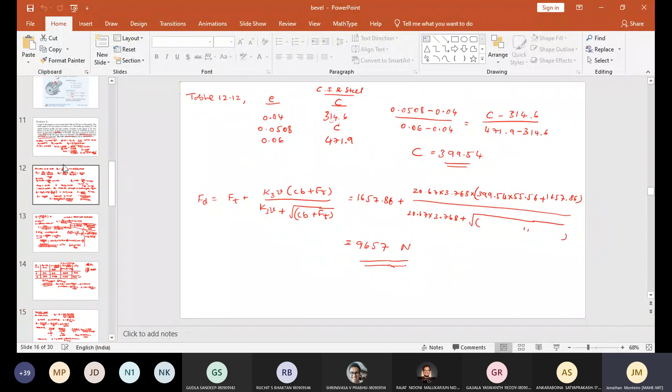Yeah, so we were continuing this problem from the previous class. Let me just recap what we did so that you will be getting a confidence. So here we had a pair of bevel gears. The shaft angle was 60 and speed reduction is 3:1. And in this particular problem, the number of teeth on the pinion was given, but we did not have what is the size of the gear.

And using the conditions that were given, especially the shaft angle, which is of a greater prominence, we came to a formula for delta 1 and delta 2: with the given speed ratio, what will be the individual angles of the bevel gear, that is delta 1 and delta 2, which are the pitch angles we calculated. You might get decimals, no problem, but that is what we calculated from the formula. So the shaft angle decides the pitch cone angle that the bevel gear has.

Then you found out what is the weaker member. You understood that it was the gear that is the weaker member. Then we continued with all the necessary adjustments, or the proportion that was needed for the cone distance as well as the face width of the gear tooth itself, and some changes with respect to FT, that is, we wrote FT in terms of module because module is still unknown, and unless module is known you cannot even find the diameter. So with these things in mind, we retained the equation in terms of module.

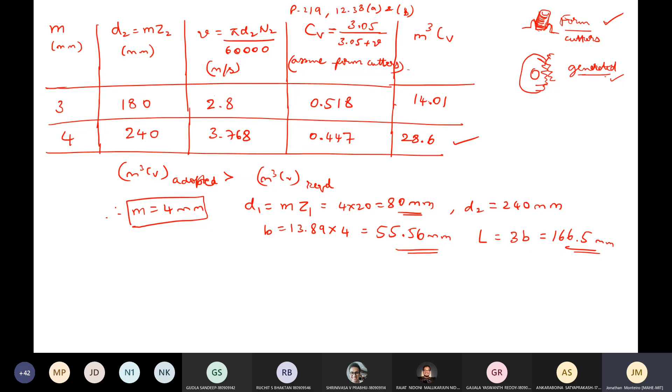Now, coming to dynamic load, we already calculated this, referring to all the 3 tables, 12.12, 12.13, 12.14, the same way. And we calculated the dynamic load FD, which came out to be 9657. I think we stopped here, so we'll continue from here.

What is the wear load? The wear load here, Fw, is D1 b Q Ke by cos delta 1. Again, it depends on D1 and delta 1; it is the pinion which decides the wear. Because cos delta 1 is there, it is a slightly changed equation. On page number 219, the equation number is 12.41.

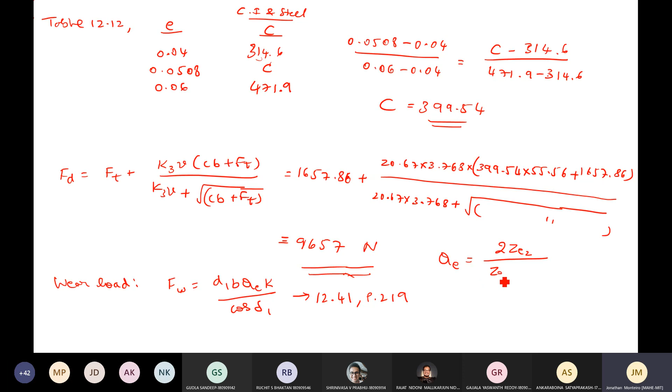And Q depends on Ze2 and Ze1. Q is the ratio factor, 2 Ze2 by Ze2 plus Ze1. We have already calculated Ze1 and Ze2; you can go back to the previous slide and refer there. Ze1 was 20.6 and Ze2 was 86.53. We calculated these in the process of finding the weaker member among the pinion and the gear, so we'll use the same properties here.

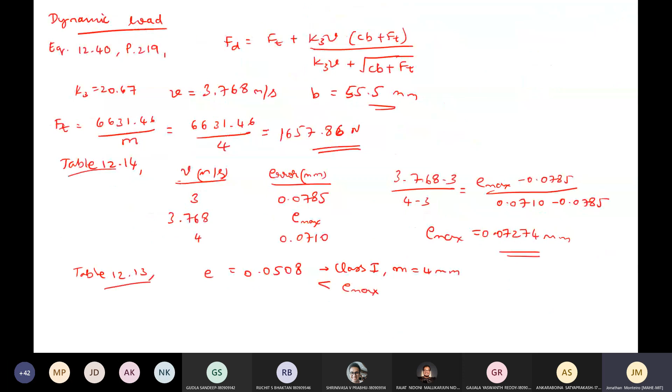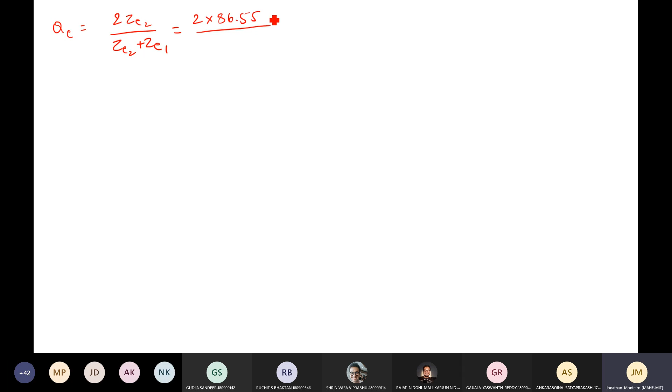Let us find out that QE is equal to 2ZE2 by ZE2 plus ZE1, which must be equal to 2 into 86.55 by 86.55 plus 20.60. So you should get around 1.615. So this will be the ratio, simple ratio to calculate.

Okay. Now since BHN1 and BHN2 are given in the problem itself, BHN1 is 200 and BHN2 is 180. Then you can find out with the 200 and 180 combination what will be the K value. So let us find out whether it is available in the table. If it is available in the table, we will use it directly, otherwise use the formula.

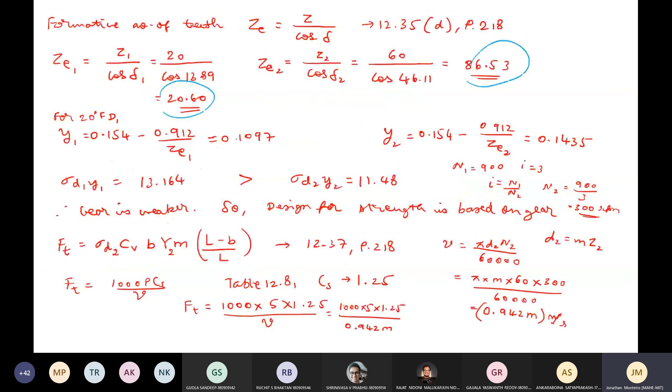Which table are we referring to? So it was table 12.16, page 239. So under this table you have 200 and 180. Let us go back to the material and see. The pinion is of steel and the gear is made of cast iron. So go for a similar combination in table 12.16, with the steel and cast iron combination.

See students, even if you use a formula, you will get the same value back, so that also you are free to do. But if you have ready values that are given at some points, that also will help you out. You can save some time.

So in this table 12.16, you will find that there is steel with 200 BHN and cast iron with 180 BHN with an endurance limit of 392.5 megapascals, and with 20-degree full depth you have the value 0.814. You can write sigma ES also, but we are not using it for any calculation here because it is already calculated and given to you. So 0.814.

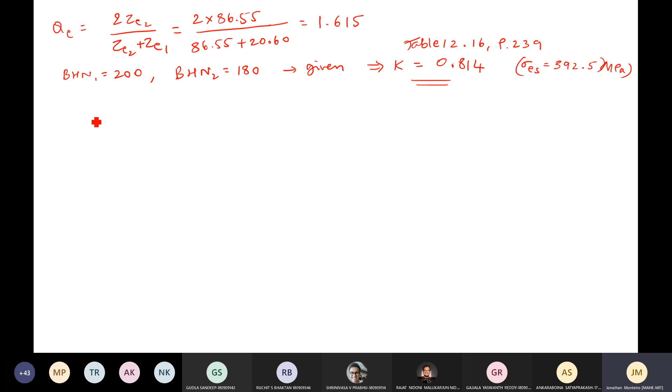So let us substitute it back and see what wear load we get. FW is D1 B QE K by cos delta 1. Substituting all the values, D1 is 80, B was 55.56, 1.615 is the QE value and K value is 0.814. Delta 1 is 13.89 degrees. You get around 6021 newtons.

And unfortunately again this is lesser than FD. For a successful combination, FW should be more than FD. So which value do we need actually? Resubstitute: FD should be equal to FW, which is equal to D1 B QE K by cos delta 1. The only factor that you are changing is K now. So search for the new factor. FD is 9657.

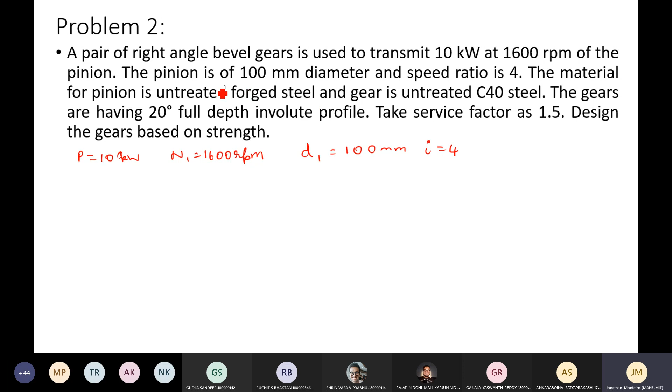So based on these two sentences, and gear is untreated C40 steel, we can find out what is sigma D1 and sigma D2. So alpha is 20 degree full depth and service factor is directly given as 1.5. Whatever be the case, whether it is steady or sudden shock loads or continuous operation, we are not bothered. We are just taking the service factor as it is. Design the gear based on strength.

So what is different in this problem is that you don't have any problems with the CV factor, because diameter is directly given. But at the same time, you are supposed to assign a particular number of teeth for this purpose. Okay. So as I was telling, one of the changes that I need to make, I think I just missed that small point. What do you mean by right angled bevel gears? And consequently, what is meant by acute and obtuse angle? I think I made a small mistake while explaining that. I'll just go back and correct that.

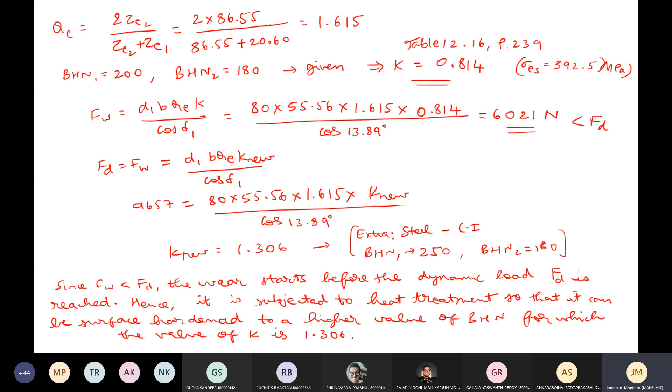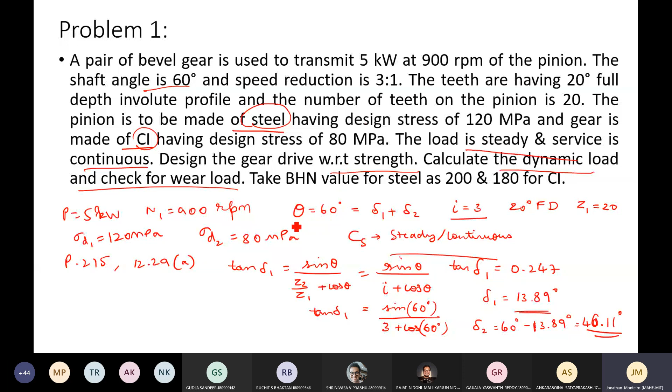So here I said in this slide that delta 1 and delta 2 are both less than 90. Actually, what we are trying to understand here is delta 1 plus delta 2, okay, not comma. Delta 1 plus delta 2, in other words, according to your data handbook, theta, the angle between the shafts, is less than 90, correct? So in this particular problem, theta was 60 degrees. So theta was 60 degrees in the beginning of the problem itself.

So acute, obtuse and right angle is totally dependent on the shaft angle. Okay, not individual. Individually, obviously it will be less than 90. Of course, when it's a combination, you have to get it less than 90 itself. But definition wise, strictly acute angled means theta is less than 90, and obtuse angle means theta can be more than 90. The angle of transmission is more than 90. Write it here, theta is more than 90, and right angled means theta is equal to 90, or the shaft angle is equal to 90.

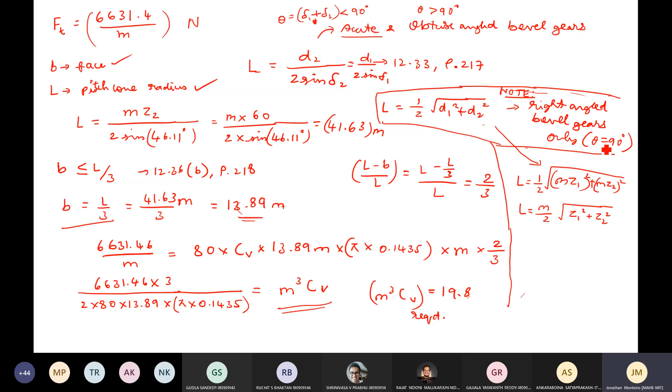Okay, so let us proceed. With this thought in mind, we know now that theta is equal to 90, and speed ratio is 4. Yeah, other things are taken care. Theta is equal to 90 degrees. Now once theta is equal to 90 degrees, some things with respect to the angles get clarified. Sine, cos will simply vanish. You will be left with a very simple set of formulae, because we know what the sine 90 and cos 90 values are. So especially for that, you have some set of values that are given in the data handbook. So you can just refer to them.

So tan delta 1 is equal to d1 by d2, also equal to z1 by z2, and also equal to simply 1 by i, according to 12.32a, page 217.

12.32a, page 217. Okay, see, you need not even know what is d1 by d2. Of course you can immediately find out, but that is also not required, because it is just a function of what is the speed ratio. So speed ratio is directly given to be 4. So this should be equal to 1 by 4, then delta 1 is equal to tan inverse of 1 by 4.